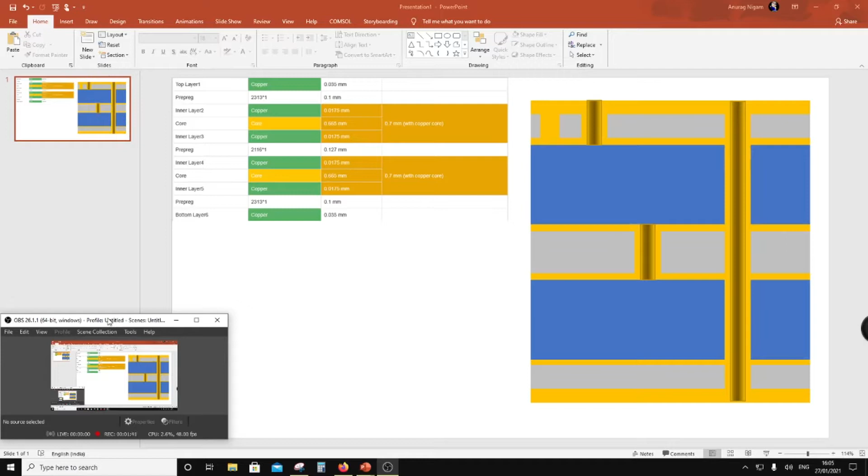Now the issue is, you can do what you call vias, which can be filled vias. Here is an example of a filled via. This via is totally filled. First what they do is they drill through, and then they fill it with some kind of conductive material. So that will be called a filled via.

Now over here you see the other one is a plated through via. What it means is that they drill through, but then they only plate the walls. Now it is easy to do this between two layers.

Now the way the multi-layer PCB is done is they do these two-layer PCBs, and then they can do these vias. But then they stick them together back to back using something called core. So if you see here, there is something called core.

Now the issue is, can you run vias through the core? Well, the answer is no. Can you do metal structures which can stick together? Yeah, but how do you connect them? So you are allowed to do a plated through, all the way from the bottom metal to the top metal.

But then doing the buried vias, you have a restriction that you can do in the individual two-layer boards and then stick them together. Then what do you do when you stick them together? Can you do vias in the core? Answer is no. So this is a big restriction in PCB design.

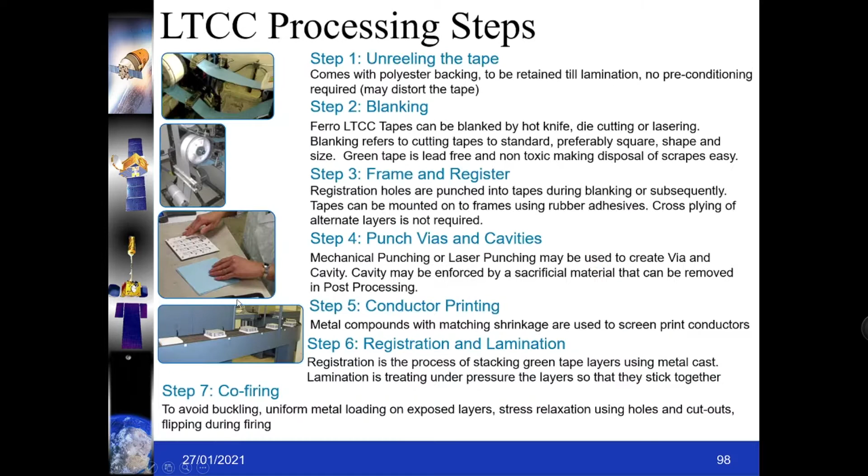Now the top and the bottom can be post fired and processed. Why do you need that? You can create pads which are copper, pins which are copper, and you can also do what are called frames or heat sinks right on top of the top layer. You can also do thick film resistors on the top layer. So that is what happens with post processing.

Now you already know what is a blind via and what is a buried via. You can also do a stacked buried via here. You can do buried integrated capacitor. You can do staggered via, where vias can be staggered, and they are very stable. Then you can do thick film resistors which are buried. And you can also do cavities.

In case of cavities, after you plate it through, you can insert a support for the cavity using some form of a sacrificial material, which after post processing you are going to remove, so that you have a clean cavity without buckling and all that.

Now calcium borosilicate is not a good thermal conductor, so all the heat has to come out through these vias only, and heat has to go to the ground. In this case, the thermal conductivity of these vias is good, but it is not going to be uniform, in the sense that you are not going to have stacked vias from top to bottom. So in that case you can have thermal vias which will take the heat from different layers and conduct it to the ground. That is what a stack up looks like in case of an LTCC.

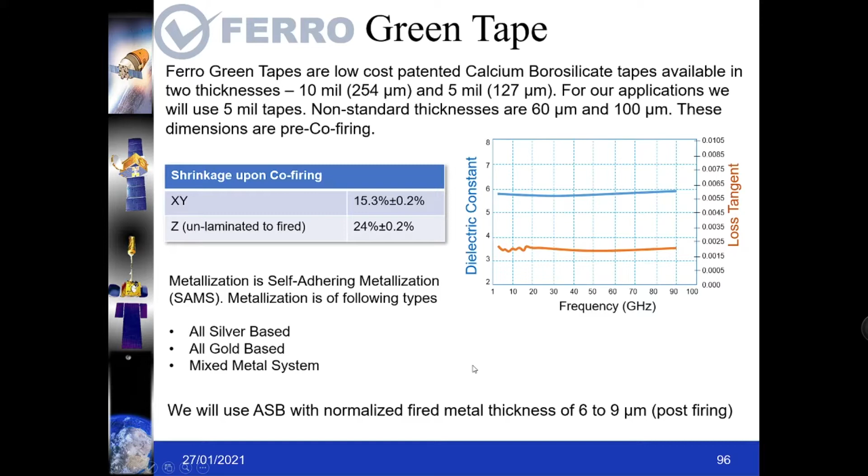Next, this can be a silver based system or a gold based system or a mixed metal system. Now pre-firing, usually this metal thickness is large, but post-firing it can come anywhere from 6 to 9 microns. So in your EM simulation the metal thickness will be 9 micrometer.

Now here what I'm showing is post co-firing processing, where you have added these shields, which are metal frames. There can also be what is called heat sinks, which you can attach. You can mount surface mount components. You can even bond the chip or a die. And then you can put a lid on it, take the air out, and hermetically seal it. So this can be done.

Now the material is chosen or designed such a way that the metal contraction or thermal expansion is the same as the tape, in terms of temperature coefficient of expansion. This is so that when you do it, the shrinkage is uniform. Shrinkage is one thing, and coefficient of expansion is another. Across temperature cycles, this TCE is going to be very less on this material, and shrinkage is uniform for metal as well as green tape.

Next is the thermal conductivity of the vias and thermal vias. Thermal vias have 50 watt per meter kelvin. There are some electrical properties of interest to a designer: dielectric constant is 5.9, loss tangent is 0.002, and insertion loss at 10 gigahertz for a trace which is an inch is 1.8 dB. Now the width is not specified here, so that's unknown. Bulk resistivity is 10 raised to 12 ohm per centimeter, so basically it's an insulator.

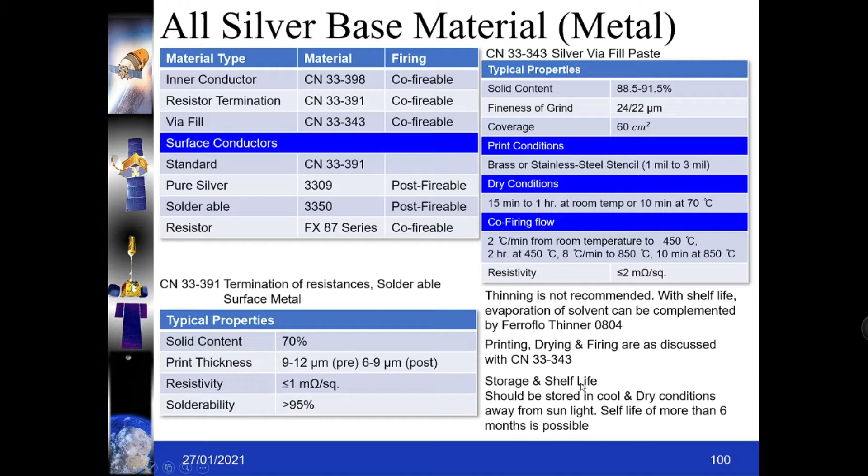So that is the all silver based metal system. Now I am going to use this stack up. Let me tell you what this stack up in ADS will look like. It will look like M0 to M7, which I am going to create. Each of them is going to be 9 micron thick, and it is going to be silver, so it is going to be 6.17 e raised to 7 Siemens per meter as conductivity, which is over on the left hand side.

Then for the top, if I do pads and all that, I'm going to use copper, which is going to be 5.8 E7, and the thickness is again 9 to 10 micron. Then for the thick film, I'm going to use FX87101, so in my stack up I'm going to declare this as 100 ohm per square. And then for soldering, the top pads, I can also plate them with the solder material, which is going to be 0.71 E7 conductivity. So this is what is going to be there.

I also have a layer which is going to be a dielectric via or a cavity. Now momentum will not allow you to do this simulation with the cavity. So the stack can have a cavity, but momentum will not allow a cavity for simulation, so you have to use EMPro or something like that. Now the material is borosilicate, which has epsilon r of 5.92 and loss tangent of 0.002. This I am going to create in ADS before I proceed to do any of the designs.

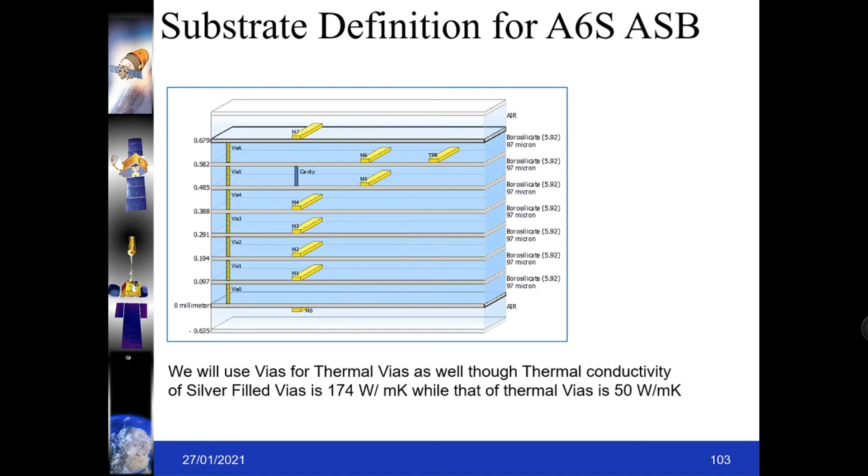Okay, now I have created a 7 metal stack using LTCC 97 micron thickness green tape, and I have one more additional metal which is for a thick film resistor, 100 ohm per square. Now you save the stack and close it.

So what we're going to do now is make a new folder and call this lines. Here I'm going to create a 50 ohm line, so I'll create a schematic, microstrip line, MICROSTRP, and create a schematic. In this schematic I'm going to create a 50 ohm microstrip line on the LTCC process. The signal is on metal 7 while the ground is on metal 6.

So I'm going to go to Tool, LineCalc, open LineCalc, and enter the substrate details. The substrate epsilon r is 5.92, height is 97 micron. Thickness is 9 micrometer. Conductivity of silver is 6.17E7. Loss tangent, tan delta, is 0.002. That's it for the substrate.

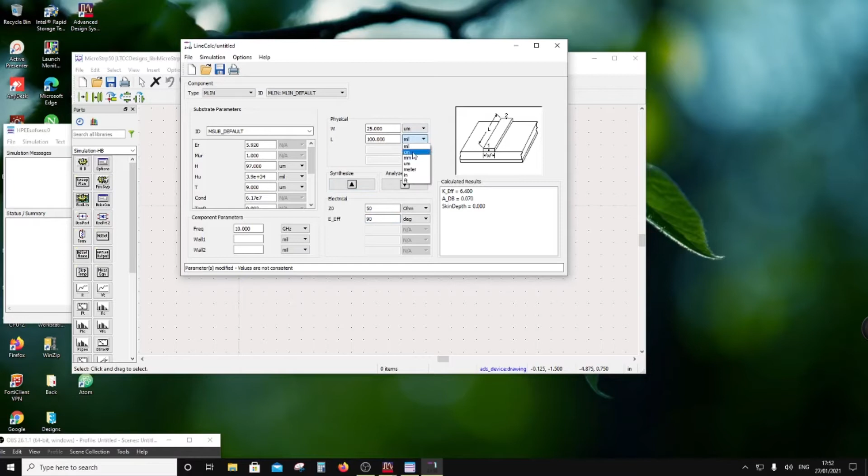Then we make sure this is going to be a 10 gigahertz line, and I'm going to make it a 50 ohm line. So I put 50 ohm, and the length of the line is 90 degrees, or quarter wave. I want the units to be micron. Then I hit synthesize, and 139 micrometer is roughly the width, and the length is roughly 3900 something.

I'm going to go and make a layout for this. So this is the information. Now let's go ahead and make a layout.

Previously we did this 50 ohm line and found the FEM results from ADS were differing from the MOM, momentum, results in ADS. This time we're going to validate it against FEM in EMPro. So let's create a new layout for the same schematic.

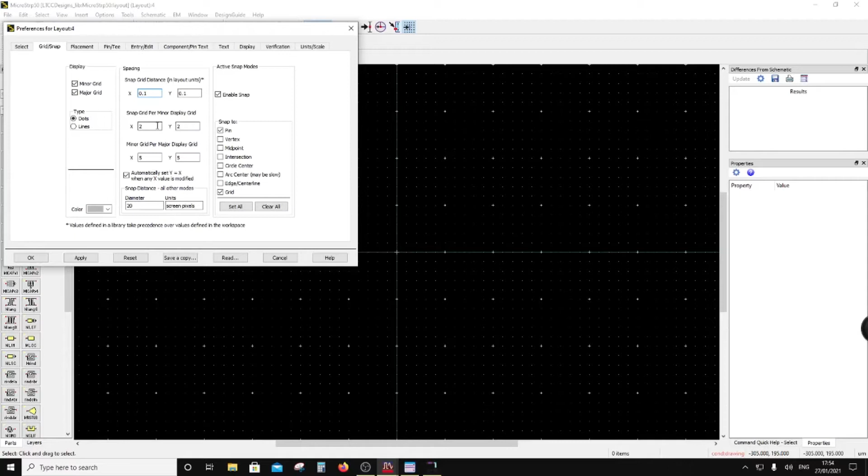Let's adjust the grid size. I want to keep the grid to be 0.1 micron, minor grid as 1, and major grid I leave as 5. I'm going to save this as a layout preference for the next simulations and layouts.

So now I'm going to use metal 7 to draw a line, 139 in width. First I'm going to set all the snap grid options, and enter the coordinate entry absolute value as 0, 0, where I'm going to start drawing the geometry from. I have to change the metal from conductor to metal 7, and I'll redo this. There you go, metal 7, and then I'm going to draw a rectangle and insert coordinate entry.

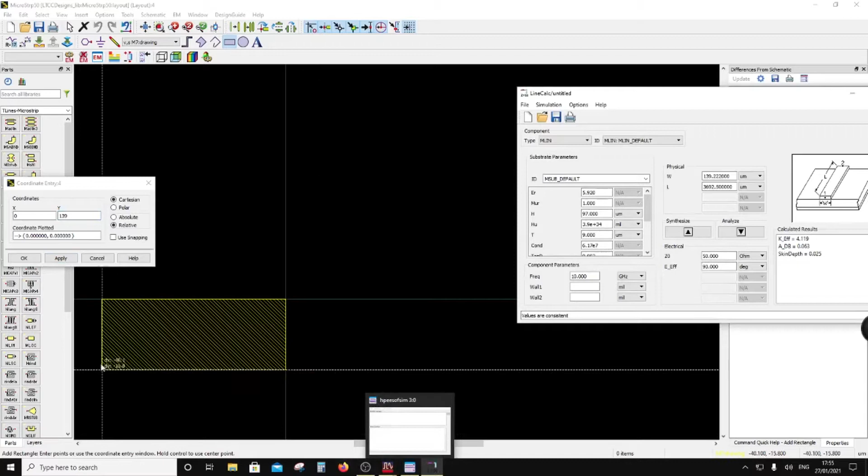Insert coordinate entry, 0, 0 as absolute entry, then say apply, and then the dimensions. The y dimension is 139, and the x dimension is 3,000 something. Okay, so this is the line, the quarter wave line as per the LineCalc.

So I'm going to go ahead and put the ground. I'm going to put quarter wave on both sides of the microstrip line. The way to do it is just take this structure and rotate it out, then extend it to the edge. So delete this one, extend this to the edge, and then repeat this structure at the top.

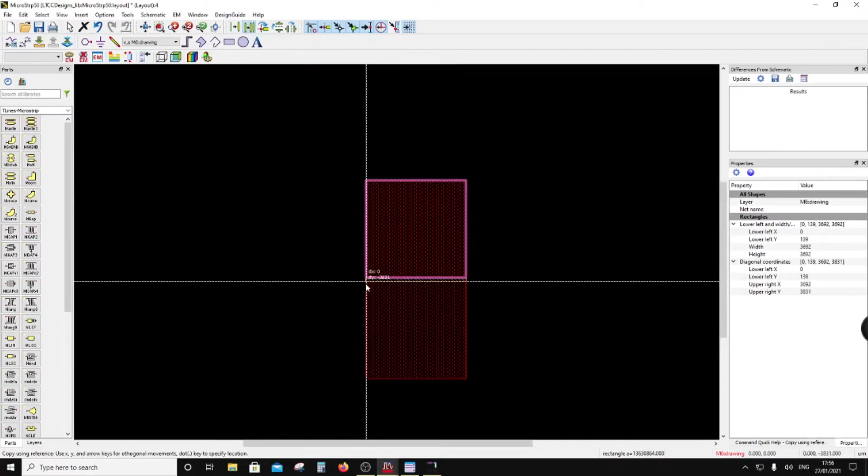I'm going to copy the structure, not move it. Then I'm going to extend the structure to be a single structure and delete this square. So now I have the layout of a microstrip line which is 50 ohm.

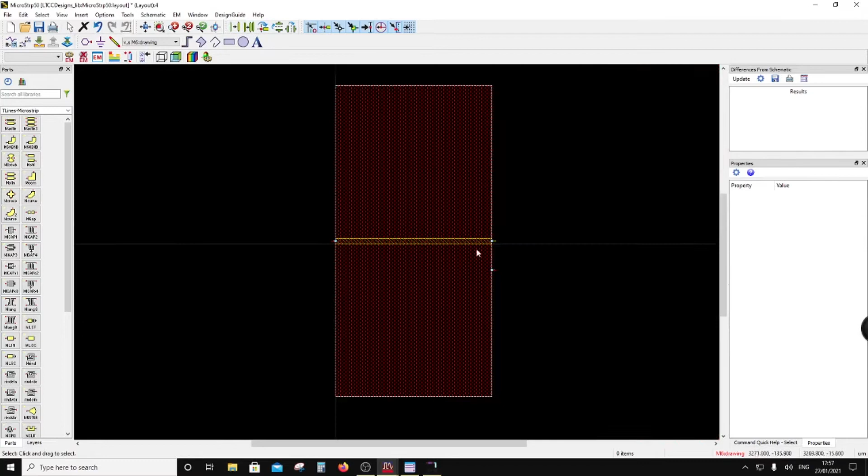I'm going to put port 1, then port 2, and port 3 is a ground reference to 1, and port 4. Snap to edge is enabled, so there's port 4. I'm going to move this ground port under the signal port, remove this additional piece of line, then move port number 4 underneath port number 2 and remove this additional piece of line. Now I have the structure ready.

Now I'm going to go and create the EM simulation setup, and go to substrate to make sure the substrate I've defined is over here.

Then I'm going to go to port editor and add port 3 to port 1 and port 4 to port 2, and I'm ready for the simulation. But before that, I should see a 3D EM preview also.

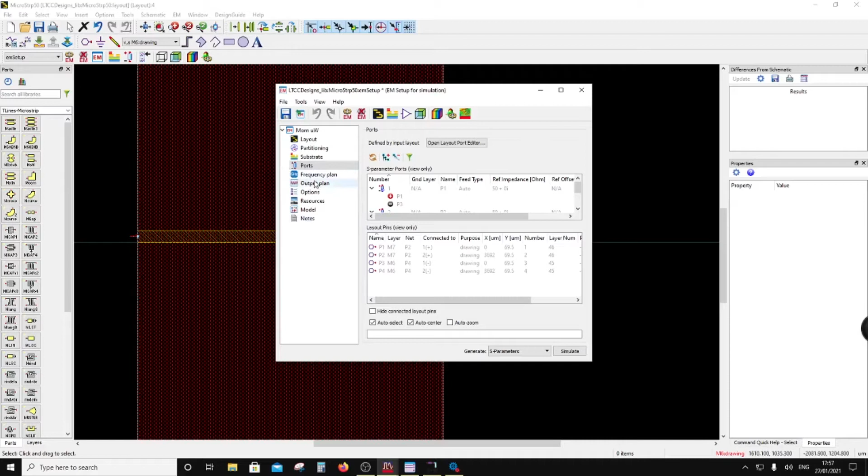So what I'm going to do is first mesh, edge mesh, transmission line mesh, and then I want to save the output for all the frequencies. I'll set the model to be saved, show that the model is saved, and I'm all set. Everything is right.

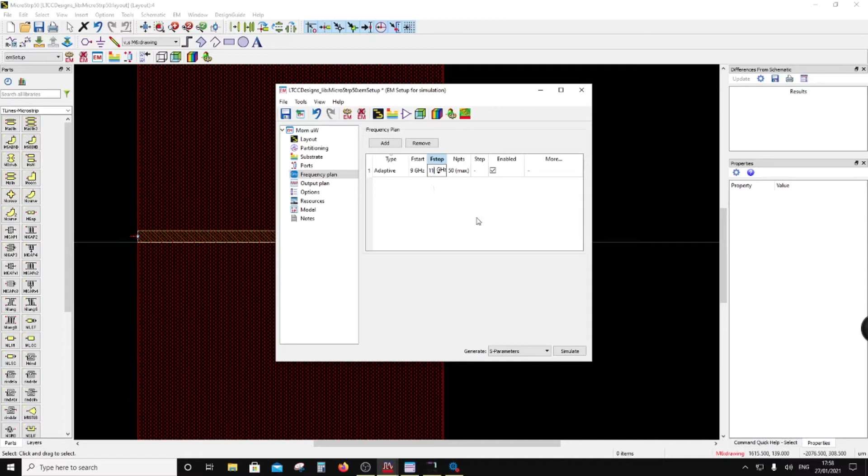Adaptive frequency: I'm going to simulate from 9 gigahertz to 11 gigahertz adaptive, and create one more point, the DC point. So I'm going to create a DC point here, add single, instead of adaptive use single at 0 gigahertz. So I'm all set for hitting the simulate button.

Let me just check that all frequencies are saved. And one more thing - I'm going to change the data set to show that this is a method of moments simulation, so I'll rename this with an extension of MOM, meaning this is a momentum simulation. Then I'm going to hit simulate.

So I'll go back to EM setup, and everything is all set. I can hit simulate.

Meanwhile this is going on, I'll put you on pause. It is computing green functions for the substrate, so it's going to take some time. One more thing you should check is the 3D EM preview to make sure the ports are connected properly - basically they should go from the ground to the signal, and that's correct. This green functions computation will take some time, so I'll pause and come back when it finishes.

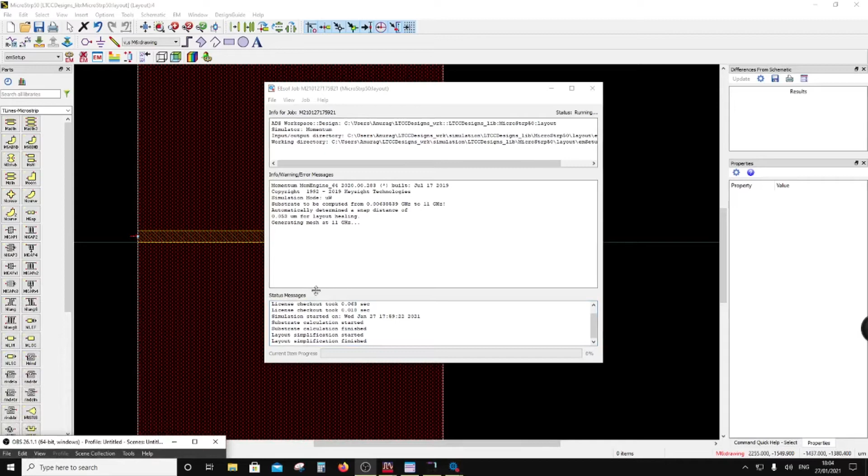Okay, the green functions computation for the substrate is done. Now it's going to mesh it. So this has finished the simulation, and the impedance looks like 50 ohms from DC to 9-11 gigahertz. This looks right, so let's go ahead.

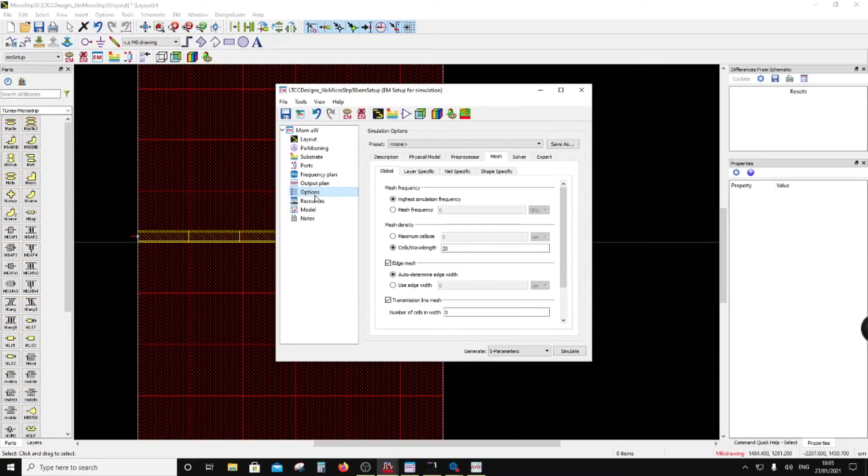So let's go ahead and do FEM simulation. I'll go change this. Everything is okay, so I'm going to change the file - instead of MOM, I'm calling it FEM now. I add FEM to the name of the file, and go to simulation setup to simulate again, making sure I write to the right file. So I'll change the simulation to FEM and hit simulate.

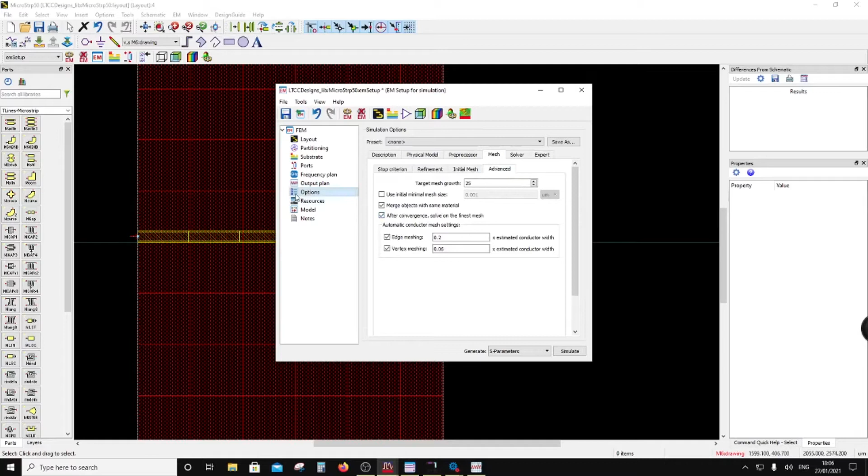One more thing: I'm going to go to the mesh options - options, mesh. All frequencies have to be saved. Options, mesh, then go to advanced, and use the finest mesh after convergence, then hit simulate. It's going to replace the original simulation file - say okay, for the EM model file, say okay, yes, and let it simulate.

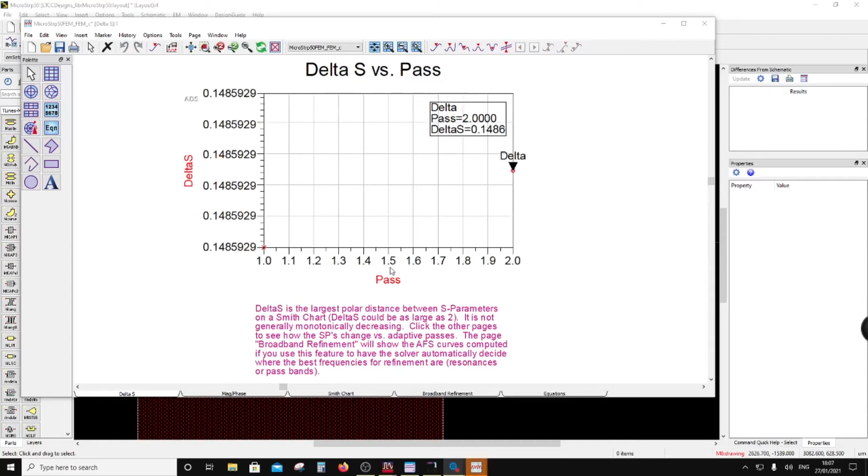So what this is doing is adaptive mesh, increasing the number of cells so as to reduce the error function delta S below 0.02. In the next iteration it has gone up, but it's going to go down to less than 0.02. Okay, now it has - so now it has found the finest mesh for a given error, and it will simulate all the frequencies.

So now what we see here is that FEM in ADS is giving much different results. You see 0 to 11 gigahertz - DC is over here, 9 to 11 gigahertz is over there. So this is much different from what momentum gives you. We have to make a conclusion here - what are we going to rely on? Let me put a marker here that says this is the FEM results, 0 to 11 gigahertz.

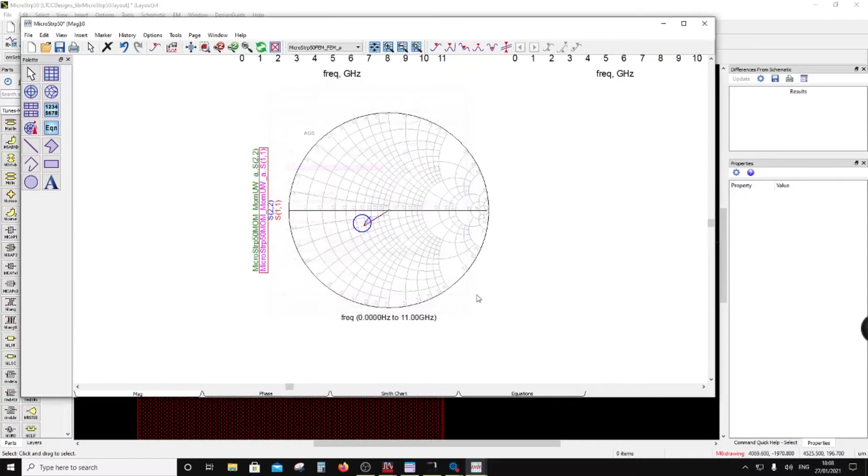Now what I'm going to do is create the same structure in EMPro. So what we're looking at is that the FEM results for the same structure in ADS are much different - this is not acceptable. We have to figure out which one to rely on, whether MOM or FEM in ADS. One way to validate it is to create the same structure in EMPro and do FEM simulations over there, so that's what I'm going to do.

Let me put some text here. Let's see.

Right, so this is a lot of variation. This is unacceptable. I am going to, so I'm not happy with this because momentum is over there and FEM simulation is over here. I'm going to put you on a pause and create a structure in EMPro and simulate.

So here is the result from EMPro on the left hand side, and I see that the result from EMPro is same as that in momentum, but FEM simulation in ADS is much different from FEM simulation results in EMPro. So let me just label it here. Now there is a question to ask Keysight guys: if ADS is using the same engine for FEM, first of all, why is method of moment results so different from FEM? And second, FEM in EMPro is giving same results as MOM in ADS, while the FEM in ADS is not matching the FEM in EMPro.

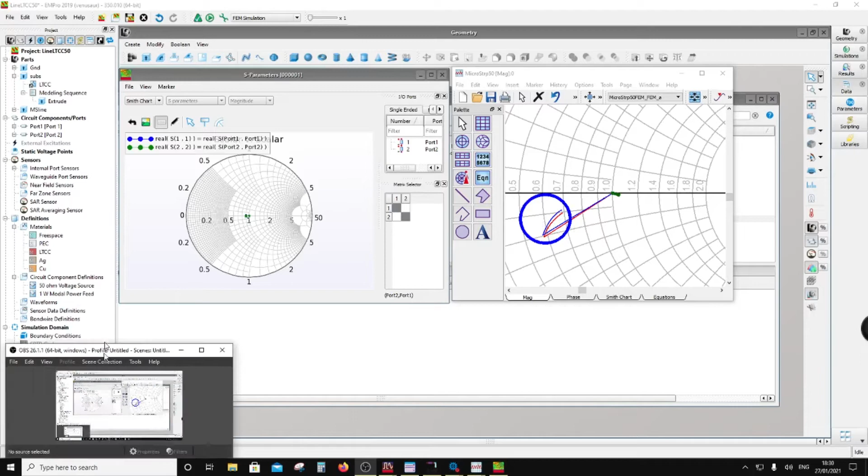So Keysight guys have to make a note of this, and they would have to answer that. What is going on? Maybe it is the extent of the port, right? Maybe it is the extent of the port. So let's see, in ADS, is there a way to set the extent of the port? I don't think so, right? So there is no way to set the extent of the port other than you just set the ground reference. So there is no way to do that.

Okay, let's see. So I don't see that. If somebody can advise me how to change the extent of the port, or if that is itself the reason for why the results are so different, I don't think so. I don't think that that's the reason why the results are so different. Okay, so I'm going to just label this, and I'm going to rely on EMPro for FEM simulations, not FEM in ADS, because it is way off. Let me label this right.

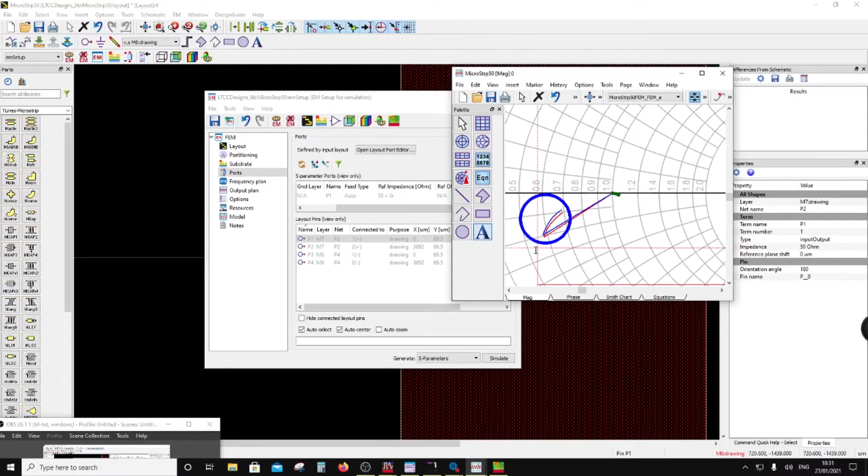So I will put a label here, FEM in... no, not momentum, FEM in ADS, right? So FEM in ADS and MOM in ADS. So the next thing is MOM in ADS. Why is FEM in ADS so different from MOM in ADS? While the FEM in EMPro is same as the MOM in ADS, so these results don't match.

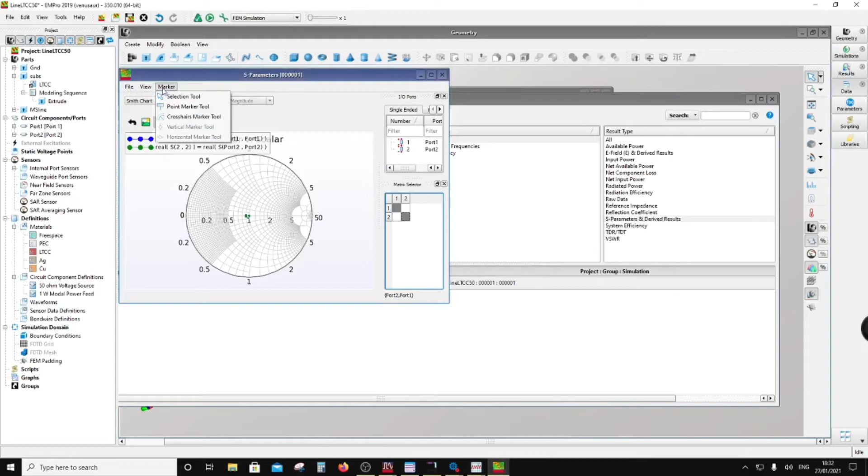This is close to 52 ohm. Okay, so I have made my conclusion. I am going to use MOM in ADS for all my designs. And when I need 3D simulations, I'm going to rely on FEM in EMPro because they seem to be more accurate, right?

Okay, so I'm going to set it up for the next simulations. I'm going to do a Wilkinson divider, right? So I need a 70.7 ohm line instead of a 50 ohm line, right? Okay, so let me just close this and let me just get set up.

I don't see that I've done anything wrong in ADS. There is no way to change the extent of the port in ADS. Okay, so I'm gonna stop here. There's nowhere it is given.

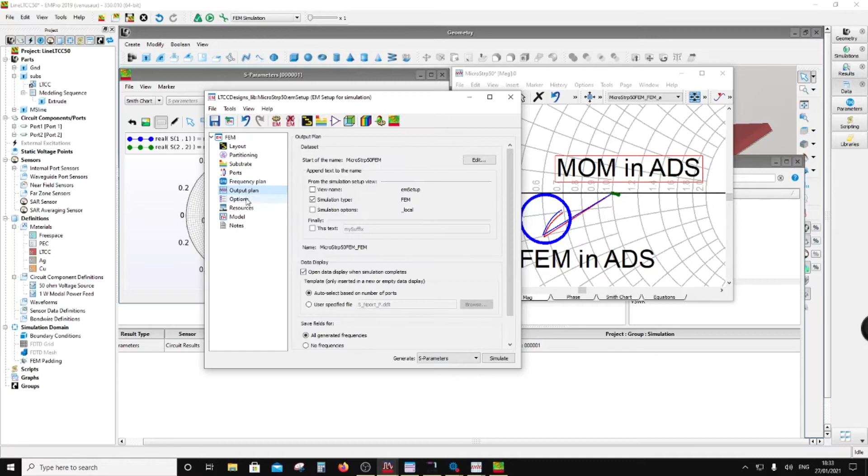So I'm not going to rely on FEM in ADS. It's way off, though it seems to use the same engine as FEM in EMPro. I don't see any other difference. And there is no way to change the extent of the port in ADS.

So MOM looks more accurate in ADS. Same as that in FEM.

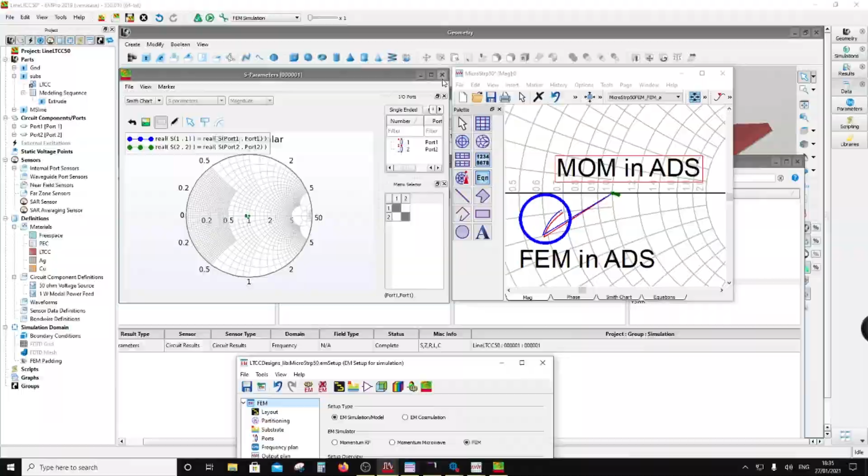Okay, so let me set up a 70 ohm line. So I'm going to make a new schematic and I'm going to call it microstrip, strp 70, microstrip 70 ohm, right? 70.7 or 70 underscore 7, yeah, underscore 7, and say new schematic. Now I'm going to go to LineCalc.

And here in LineCalc, I'm going to change, so I'm going to put back 5.92 as epsilon r, height as 97 micron, thickness as 9 micrometer, conductivity as 6.17 E7, and loss tangent is 0.002. And I'm going to make a 70.7 ohm line and 90-degree long. And I want results in micrometer. And I'm going to hit synthesize.

So this is 65.5 as the width and 3,832 point something as the length for a quarter wave long line at 10 gigahertz. Okay, so I'm going to make a new layout quickly for this one.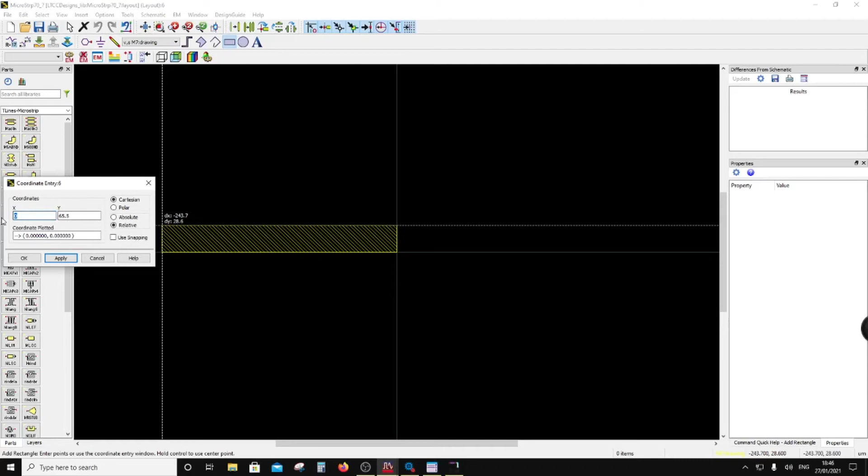I'm going to start with a corner at 0,0, using coordinate entry absolute 0,0. This is conductor, so let me change it to metal 7, and draw a rectangle with origin at 0,0 absolute, then relative, with height 65.5 and width 3832 micron. Say okay. So there's my microstrip line.

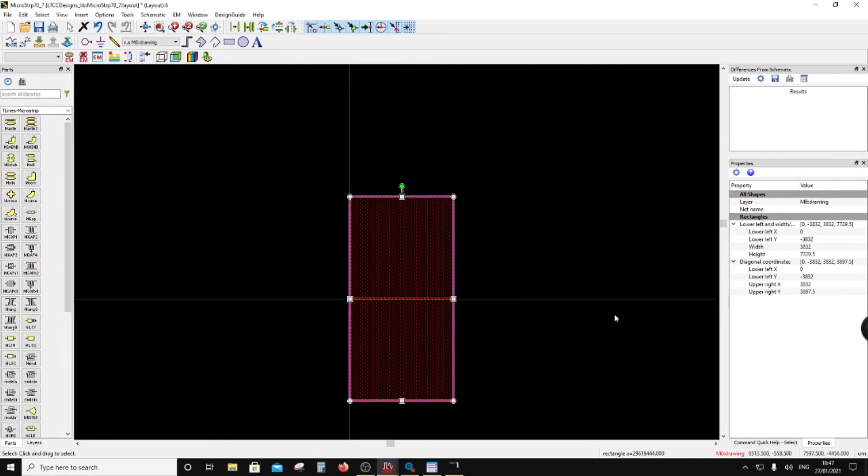Now I'm going to put a quarter wave ground on either side. I'll take the length and make it the width on metal 6, then rotate it and stretch it along the length, so basically I have a quarter wave on either side of the line. This is the best thing I've seen for impedance control, putting quarter wave ground on either side. I'm going to remove the extra polygon on the ground plane, the top one, not the bottom one. Delete. Now I have the structure for a 70 ohm microstrip line.

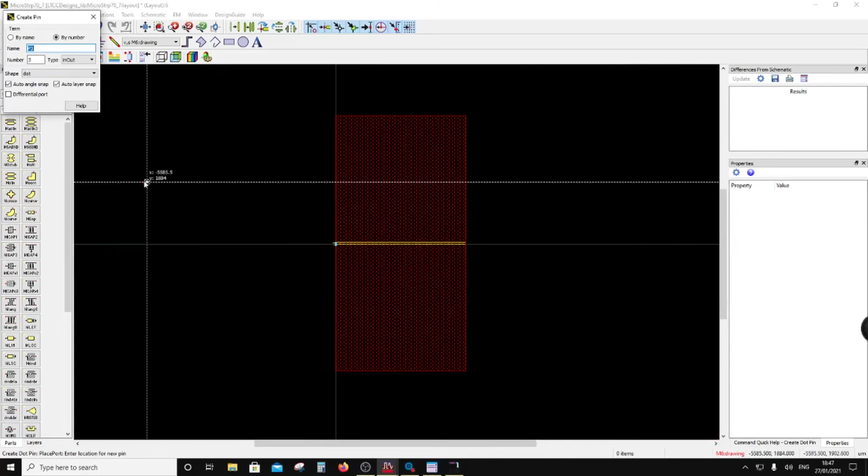I'm going to put the ports. Port 1... no, not here. Port 2 is the signal. First you do all the signal ports, then the ground reference ports, because in simulation this is going to remove the ground reference ports. So this is port 2, port 3 is a ground reference for port 1, and port 4 is a ground reference for port 2. Then I'm going to move them underneath like this, remove this line, move port 3 under port 1 and remove the additional piece of line, and I'm all set.

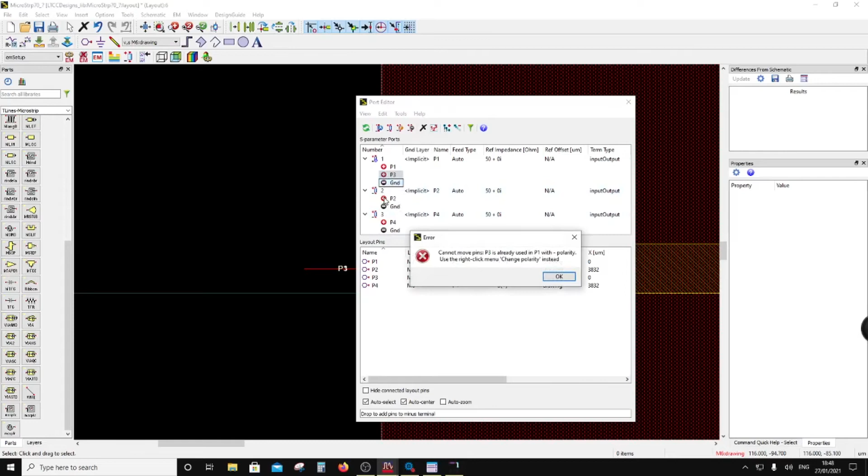Now I'm going to go to EM simulation, create, go to port editor, and port 3 is a ground reference to port 1. Let me extend this. Oh no, let me see if I can correct that, because I cannot move it. So what is the way to correct it? Maybe I can just delete the ground. It doesn't move, right? Oh, now port 3 is gone. No, this is not going to work. The problem is I might have to remove it and place the ports again, because it doesn't let you correct it once you make a mistake. Port 3 is gone, I can't add port 3 now.

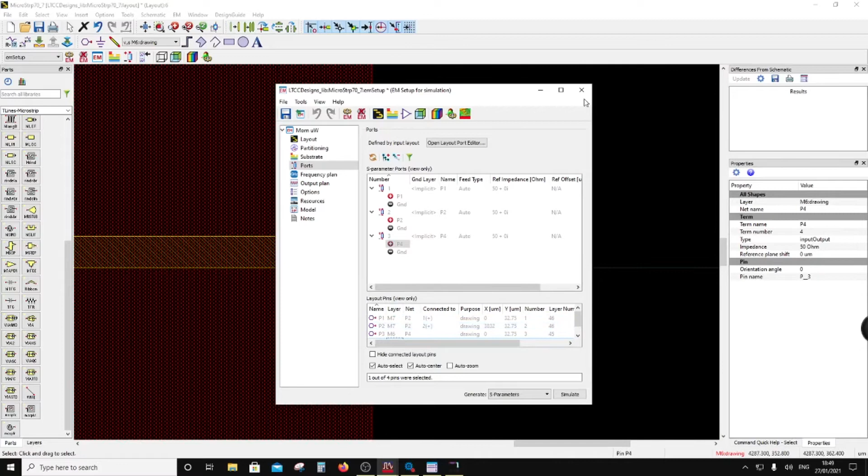So what I'm going to do is delete all the ports now and put them back again. Port number 1, port number 2, port number 3 directly I'll put it, port number 4, and I'll change the metal layer. So this is 1, this is 2, and this one is 4. I'll change the metal to metal 6, and then change port 3 to metal 6 also. Okay, so I'm all set, make sure they're on the right layer.

I'm going to go back to EM setup, and this time I'm going to not make a mistake. Go to port editor and extend this down, so clearly 3 is reference to 1 and 4 is reference to 2. So I'm all set on the ports.

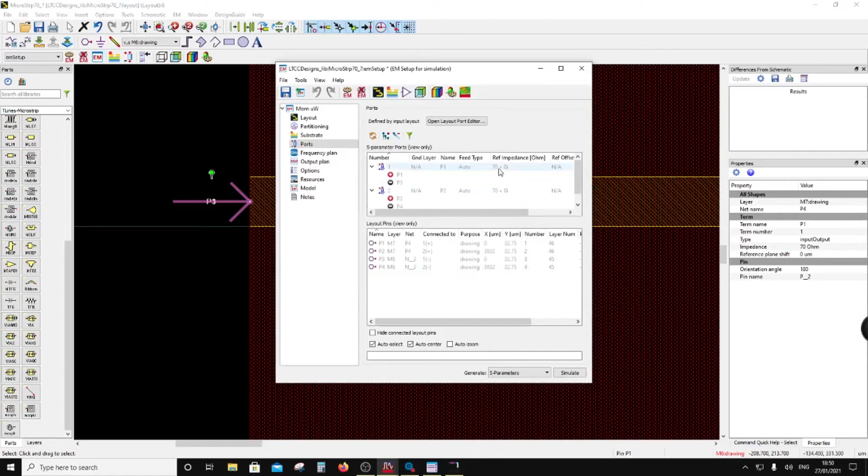One more thing is the port reference was 50. Now I'm going to make it 70. Leave it on auto, because when you do DC simulation, the DC point is going to just get stuck if you don't leave it on auto. Maybe the port has to be 70.7, not 70, so let's go back and put that 70.7. And this is also 70.7. So 70.7 is going to be the normalizing impedance, because these are generalized S parameters, so that will be the center of the Smith chart.

Frequency is from 9 to 11, and I leave it to adaptive. I will not add a DC point. Then under options, go to mesh, edge mesh, enable transmission line mesh. Then ensure that the model is created, and I think we are all set. Save currents for all the frequencies, and then you're ready to hit simulate.

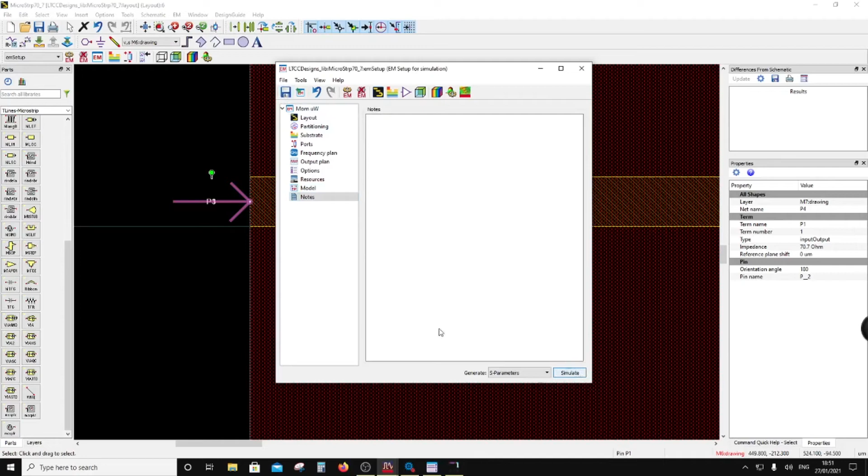Once this simulation is over, we are going to see S11 and S22 at the center, and this time the center is not 50, it is 70.7. So it is reducing the mesh right now, meshing at 11 gigahertz. There is a mesh reduction in momentum. Here you go, it has meshed at 11 gigahertz. Now it is simulating.

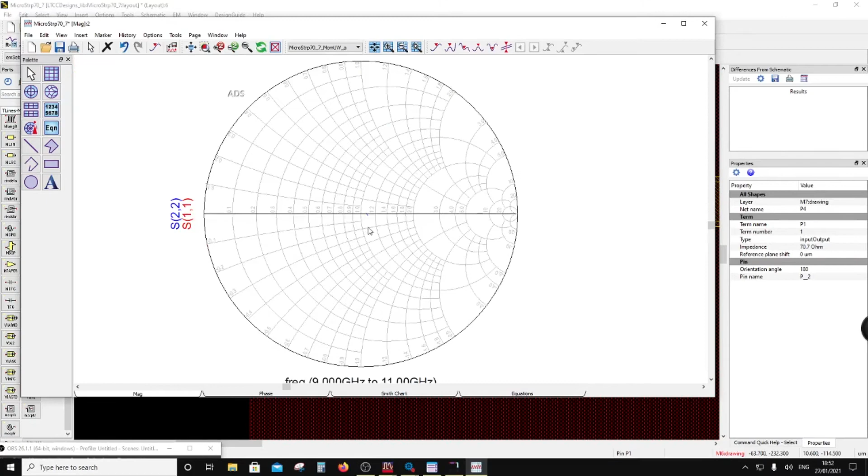Okay, so now I'm going to plot S11 and S22 on the Smith chart. Okay, so they are off center slightly.

Okay, let's now put a marker and see what they are. So this is normalized to 70.7, isn't it? No, 70.7, because the center is the 70.7. So let's put here 70.7.

So now it has read 76. It has to be 70. So we are 6 ohms in error. Now is this an error because I feel that this is a thick metal and MOM does a computation on thick metals? So let me not change this. Okay, I am going to go and create the same structure in EMPro and see what is the impedance.

Yes, I can shrink the width of the line, but I'm not going to do that because I'm not sure whether the momentum gives the right resistance, because it's using thick metals, right? So I'm going to go and change it.

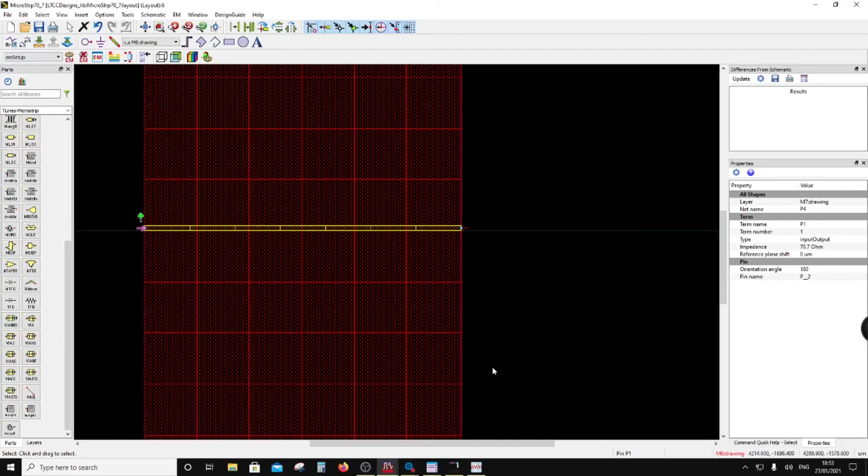So here I have created the EM simulation. 70 ohm is the center. Now this looks much better than MOM. So this shows that 9 to 11 is at 70.7 and the DC is a little way off.

So I am going to not change the dimensions of the 70 ohm line. I'm going to use the same because I don't believe in momentum as much as in FEM and EMPro, right? So I'm going to just use the same width of 65.5 micron for a 70.7 ohm line, right?

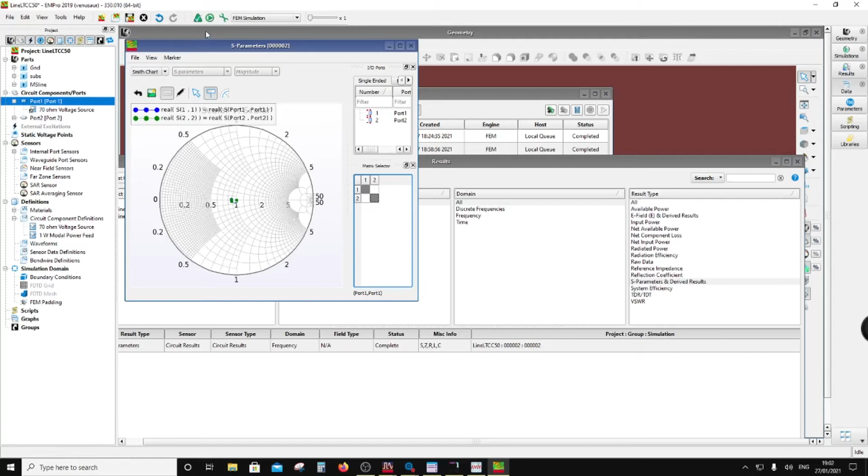Okay, so let me just close this and let's start creating a Wilkinson divider. So first of all, I want to create a Wilkinson divider using this 70.7 ohm line, which is 65.5 micron width and 3832 micron in length, right?

Okay, so let's go ahead, let me get started. Let me put you on pause. Okay, so here I'm going to create a new schematic.

Call it Wilkinson divider two-way, right? So go to files, create a new folder and call it passives LTCC. Yeah, passives. Okay, dividers. Okay, so let's call this folder divider, create a new schematic. Wilkinson div two-way.

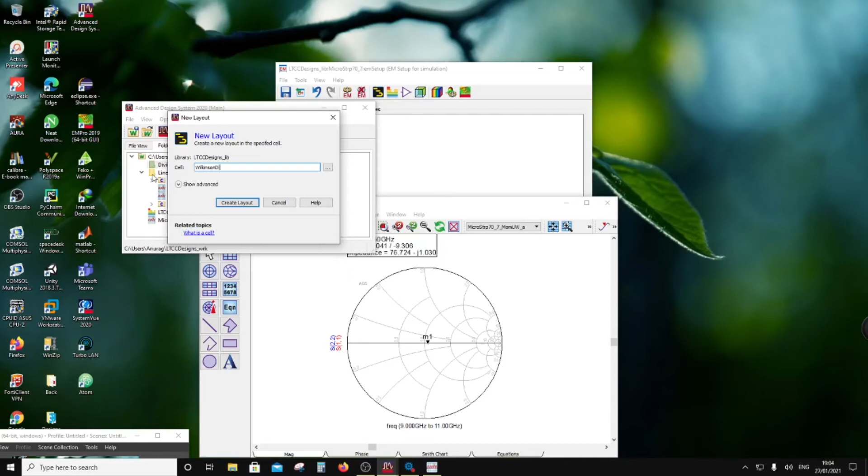Okay, so it's a two-way Wilkinson divider. The divider uses 100 ohm resistance between the two branches. So I'm going to use a thick metal film resistor, 100 micrometer square.

Right, so first of all, let me find out trace, and truncate is the end, and the width is 65.5. So I'm going to start at the origin at 0, 0. Insert coordinate entry, absolute 0, 0. Okay, so now I need to go certain length at an angle, right, on metal 7, right? Okay, on metal 7, I'm going to create a trace at the origin at 0, 0.

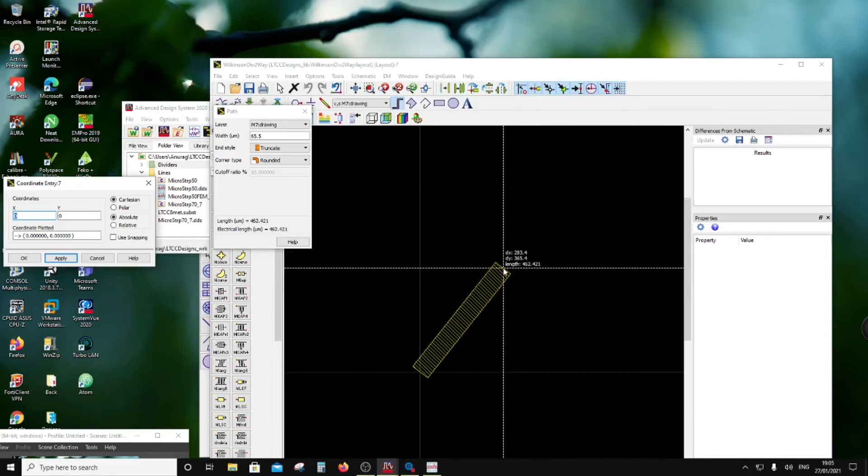Okay, so let me get the length of the line. The length of the line is 3,832, right? 3,832, so that will be the trace length. So I am willing to put 380 or 400 going away from the center, probably at an angle of 300, at an angle of 45 degrees, isn't it?

Don't want to grow like a square, right? Okay, I'll go at an angle of 45 degrees. Okay, there it is, 45-degree angle. Okay, on this I want to go 386,

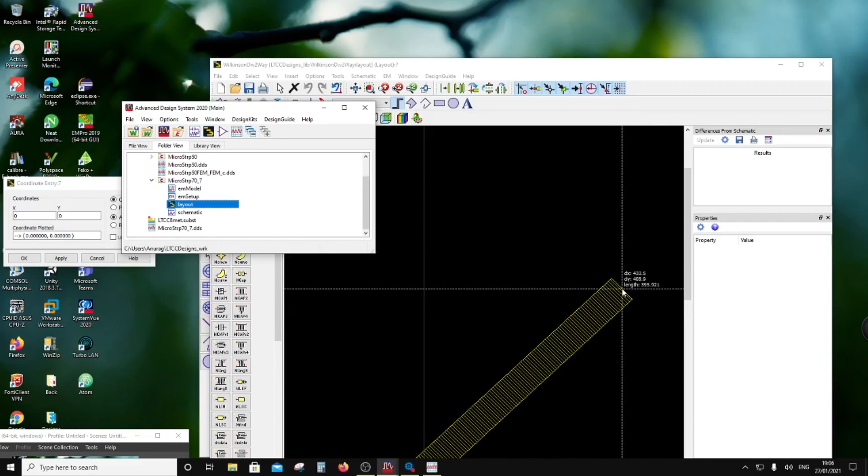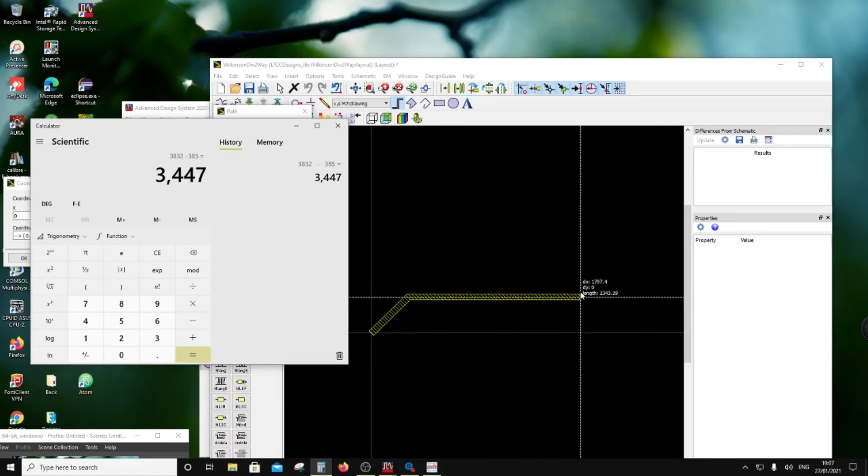and then I want to go the remaining. So 3,832 minus 386. Okay, let's use a calculator. 3,832 minus 385. Okay, 3447. It's over here, long way to go. Yeah, so that's almost it.

And I'm going to double click here. Double click that. Okay, there I am. You want to maintain a straight line. Okay, double click that. Double click. Okay, done. So let me just click tick and check the length.

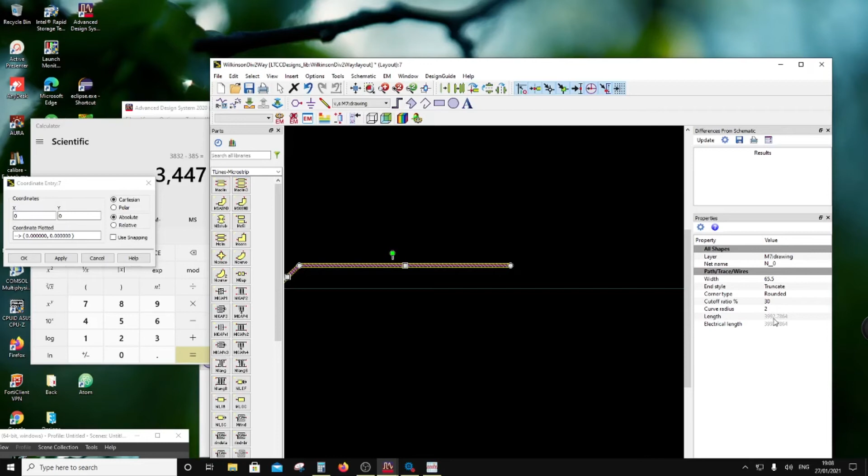It is 3,992. So 3,992 minus 3,832, right? So I'm in error right now. 3,992 minus 3,832 is 160. So I have 160 longer lines. So I'm going to shrink this.

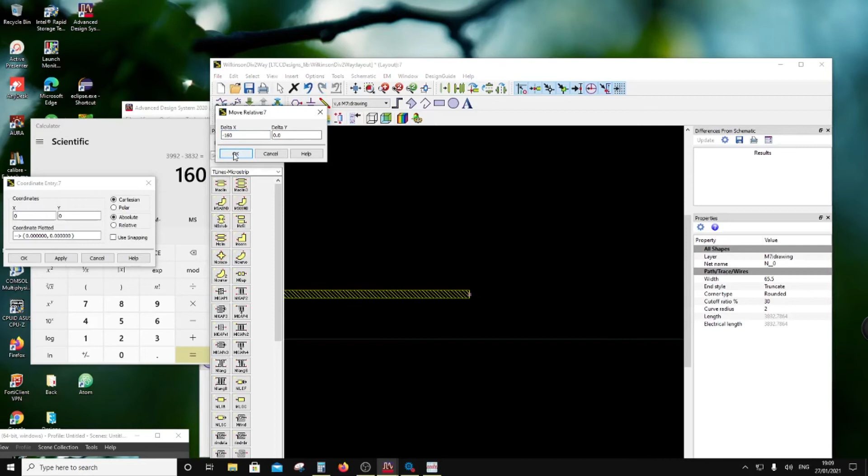Move, edit, move relative 160. Okay. So, oh, sorry, wrong way. Let's do an undo. Minus 160. Say okay. Okay, once I'm done with this, I'm going to take this structure, copy it and flip it.

Copy it and then flip it along x-axis and then match these two corners. So I'm going to move this corner to that corner, and that's my Wilkinson divider. Now I need to add a 100 ohm resistor here, so 100 ohm per square.

So I'm going to use TFR, thin film resistor. I'm going to use 300 and something by or 250 by 250 or 300 by 300. As long as it's a square, it is going to be 100 ohm, right? So that's it. So that I'm going to place at the center.

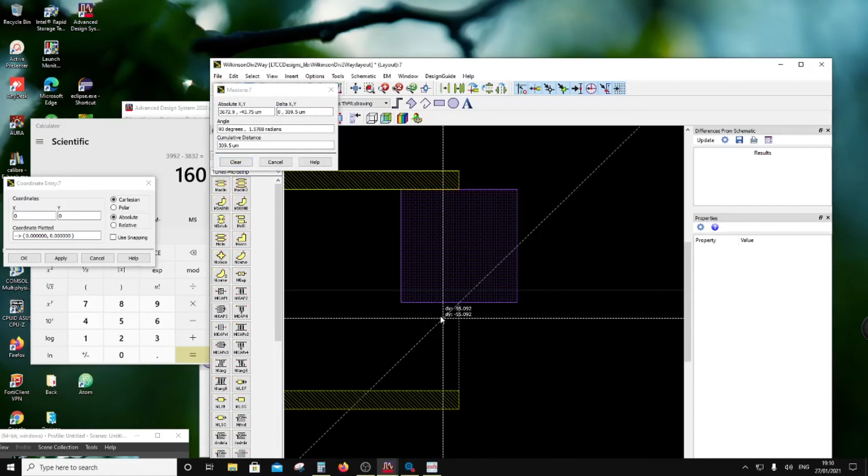So let me just center it out. I'm going to move this down to the center. Let me check how much I have to move from this edge - this thing divided by 2.

So I'm going to move this, move relative, and 150 something - 155, that's almost the center.

Then I'm going to use metal 7 to connect this. So I'm going to put the same width of the line to connect to the resistor. 65.5, right? So let me just put here metal 7, 65.5.

I'm going to rotate this and center this to the resistor, shrink it to the size, and copy this and do it on the other side too.

Sorry, copy this to the other side, isn't it?

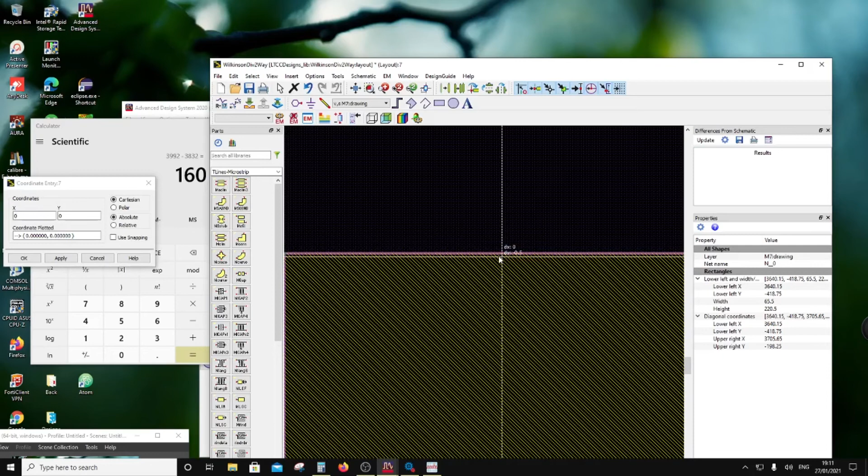Okay, so this is done, but then this contact I need more overlap, right? So I'm going to copy this structure and repeat it again here, rotate this, and put it on either side of the resistor like this, make it the same size, and do the same thing at the bottom.

Okay, I'm done. Now I want to take the two lines to the edge, right? So I need to attach a 50 ohm line going to the edge. My line is 139 micron wide.

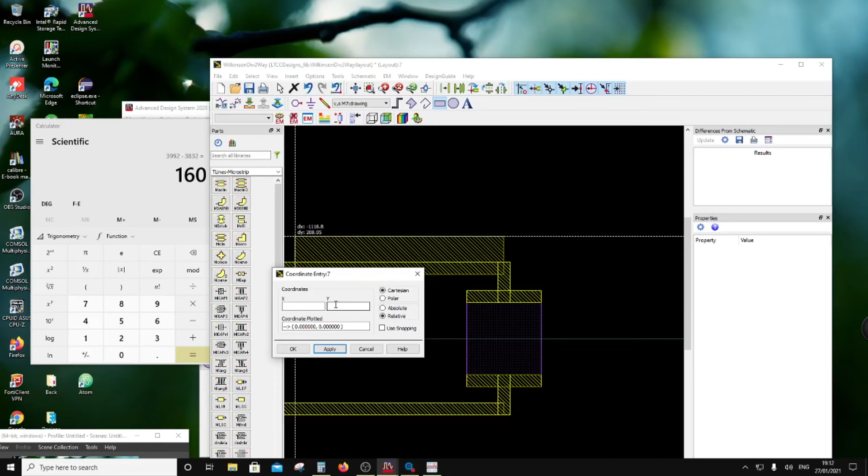So I'm going to put here some line which is going to be some length, let's say 160, 150 long and 139 wide, right? And say okay, and I'm going to center this line.

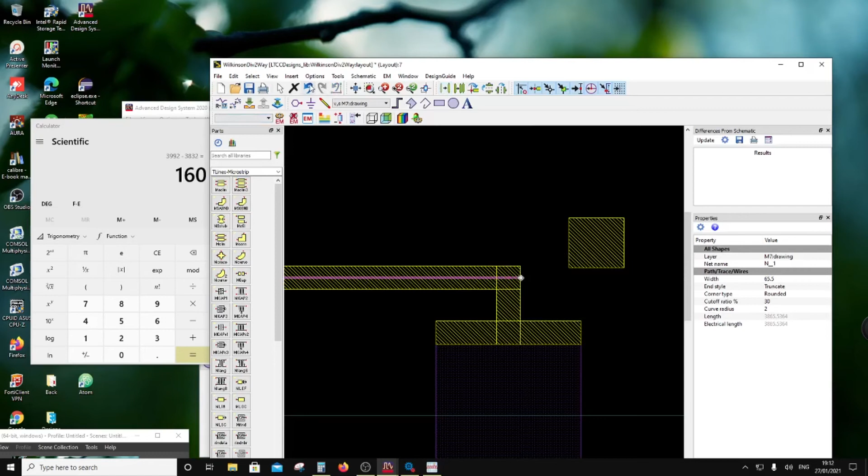So no, that's not going to center this. Okay, let me... okay, let's center this.

I'm going to extend this to the right beyond the resistor and copy the same stuff on the other side.

And I'm going to copy the same 50 ohm line to the input side. Okay, little more to the right.

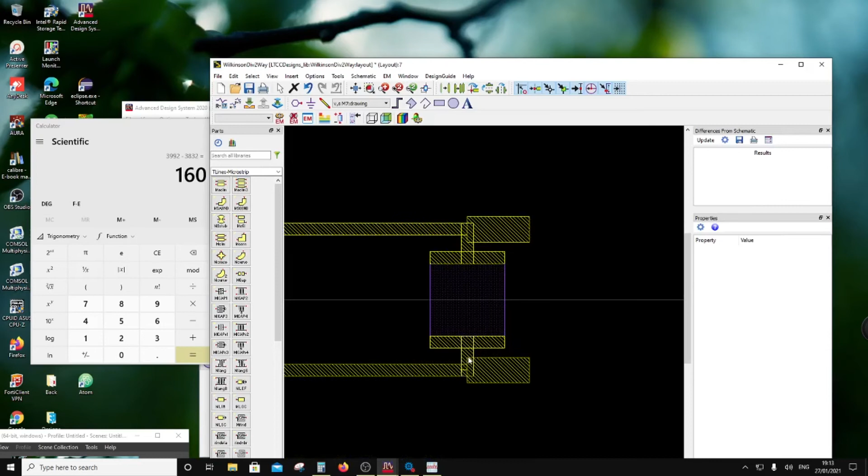Okay, done. Now I'm going to merge all metal 7 layer as one. I'm just going to remove the measurement stuff, which is at the bottom also. Remove that and select all metal 7.

This, and this one, 50 ohm, this connection, everything - and say edit, merge, union, and say okay. So now everything has become a single metal.

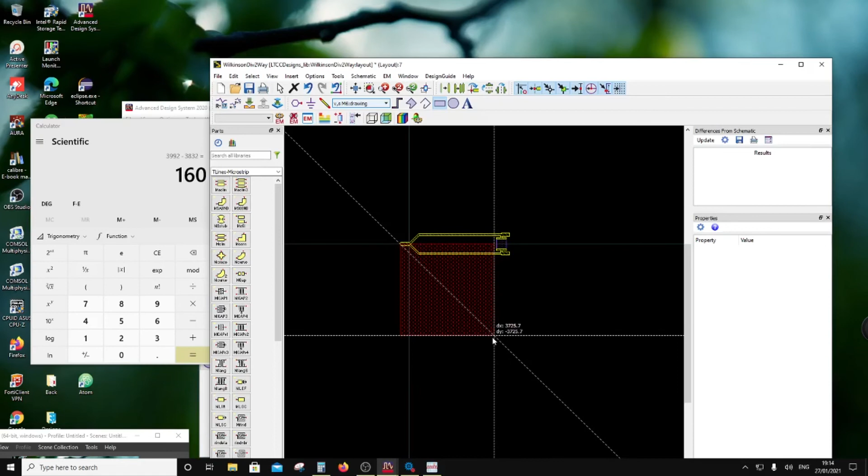Now I'm going to put in the ground plane, quarter wave. So roughly 3832, right? And there you are, 3800 and something.

Extend it to the edge and make a copy of this, repeat it on the top, then extend it all the way down and remove one of the polygons. Okay, so we are set with the structure of a Wilkinson two-way divider with a 100 ohm resistor.

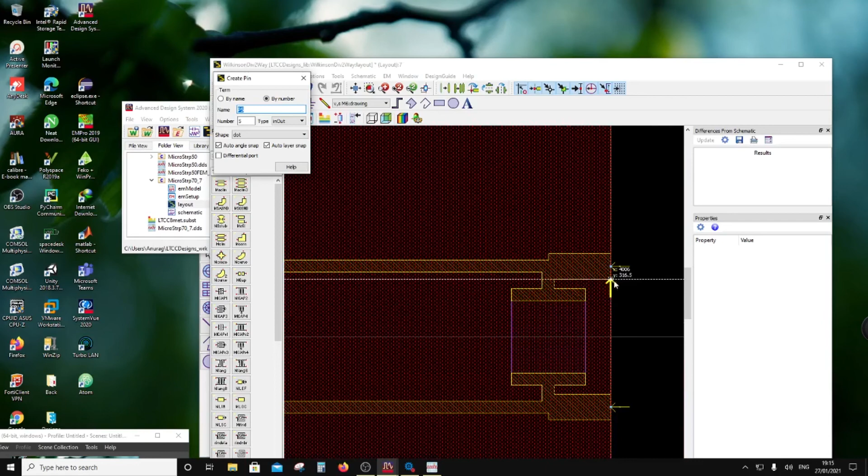Now I'm going to put the ports. Okay, so port 1, port 2, port 3, port 4 is ground reference to 1, port 5 is ground reference to 2, port 6 is ground reference to 3.

Now I'm going to move them underneath quickly and remove this additional line. Same I'll do for port 2 - remove the additional line, delete, and here this one I'm going to move to the initial line. So we are all set with the 3 ports.

Now before I simulate, I should see if everything is okay. So I'll go to port editor. 4 is the reference to 1, 5 is the reference to 2, and 6 is the reference to 3.

So I'm all set. Now I'm going to go and see the 3D preview to see all connectivities are okay. Oh, so the thick film resistor is parallel with metal 6.

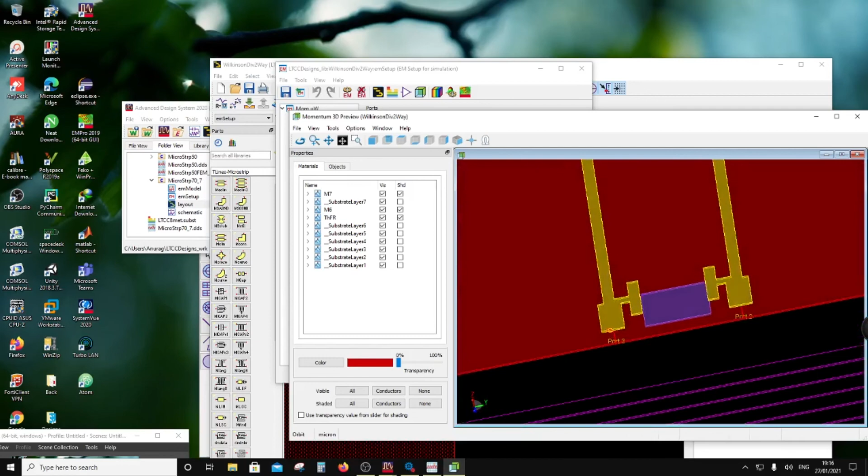Now I don't want to disturb the ground plane. Okay, anyways, we are practicing. So how about I move the thick film resistor to the top, right?

So instead of doing any other edit, I'll go to the substrate. There's no way I can remove the ground underneath, so anyway I'll have to go to substrate and move this thick film metal to be adjacent to the same layer as metal 7.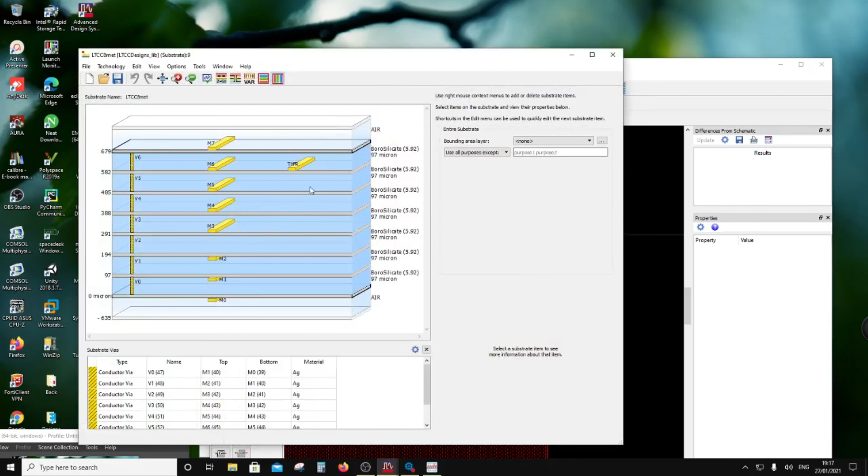This is along with 7, and says save and close. Now I go to EM setup and look at the 3D EM preview.

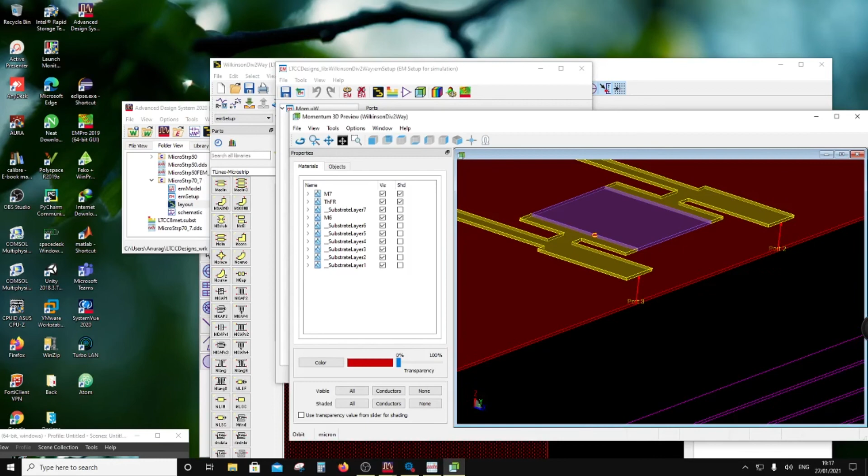Okay, so now this looks correct. So this is connected now. So we have a Wilkinson divider with 100 ohm in between. Okay, so let's set up the remaining settings. So this looks okay, according to me it is connected.

Okay, so now I am going to set frequency from 9 to 11 gigahertz as adaptive. Then I'm going to go to options. Output all frequencies, save the currents for all frequencies. Options, mesh, edge mesh, transmission line mesh, and then create an EM model and hit simulate.

So we are all set. Let me check the ports once more, whether they are having the right reference. So they go from the ground up to the signal, so they look right. So they are referenced right, so that's fine.

So we are ready for the simulations, and hit simulate. Let's see what happens. If everything is right, the answer is going to be 50 ohm on all 3 ports, correct?

Okay, so it is doing the meshing at 11 gigahertz, mesh refinement, reducing the mesh size.

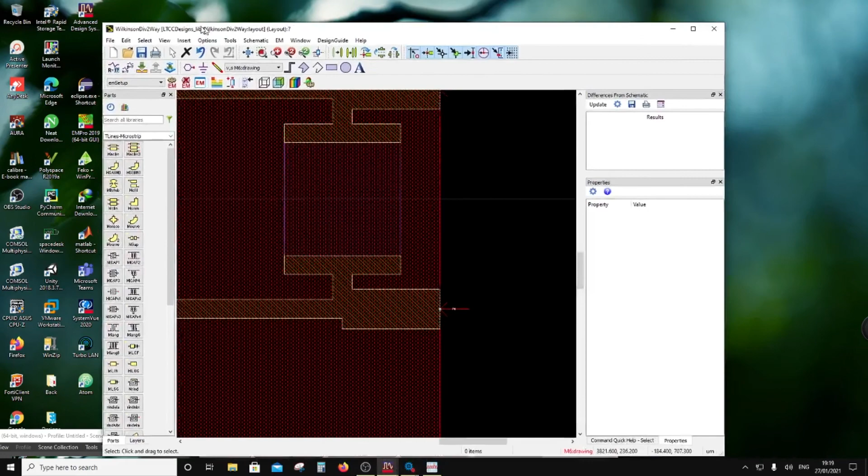Okay, so I guess it's done. Meshing is done at 11 gigahertz. Now it is doing the simulation.

Okay, so I guess it's done. Okay, so now I'm going to look at S11, S22, S33. First of all, to make sure everything looks okay, S11, S22, and S33.

Okay, so well, they are close to 50 ohm, right? So return loss better than 15 is possible.

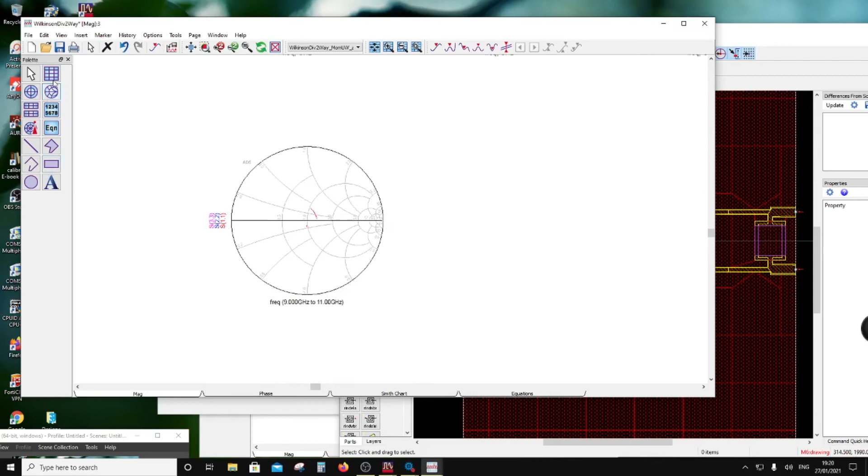And let's look at S21 in dB and S31. So this is 3.3, right? So S31 in dB, okay, that's also right, close by.

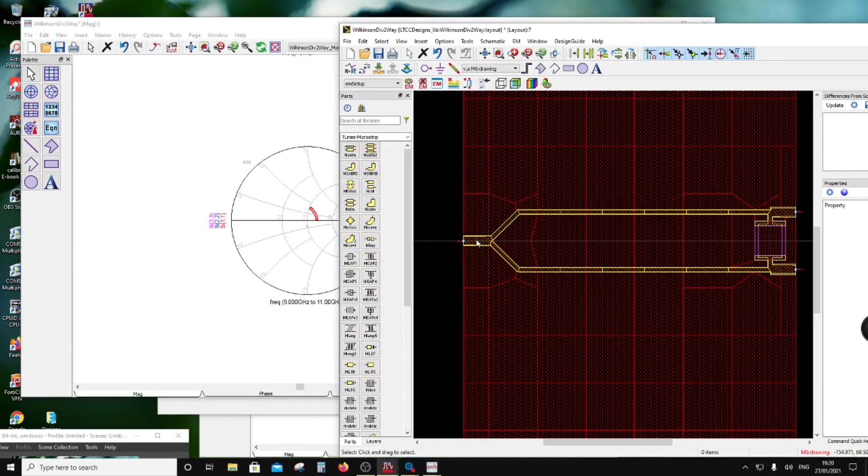So now I want to put S11, S22, S33 on the same graph. Okay, this S11 is off, maybe because of that 50 ohm line. So later we will shorten this one.

Okay, so S22, S33 are close to 50 while S11 is slightly off. This may have to do with the lengths also. You can slightly adjust the length also.

Okay, so I'm going to put everything on the right hand side axis, S11, S22 and S33. So they are better than 15, right? So the worst is S11, but it's still better than 15.

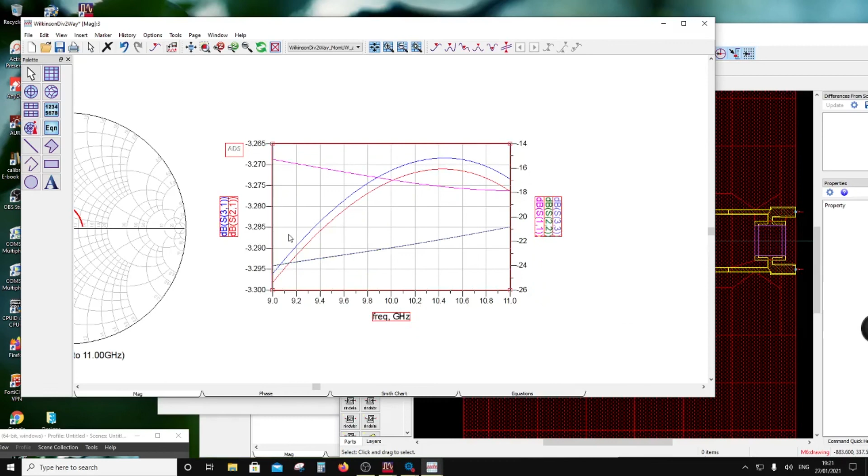So I think I'm done with the two-way Wilkinson divider, right? Okay, maybe. Okay, this I'll change to green so that it is visible. So S22, S33 look good, but S11 is slightly off.

So I'm going to do one more simulation where I'm going to shrink the 50 ohm line, if that is the reason. First of all, I'll go to simulate and clear mesh, clear momentum mesh.

Then I'm going to move these ports to the side like this. Move the ports to the side, delete this, and then I'm going to move 100 micron in.

So edit, move relative, 100. Okay, I can move 50 more in or maybe 100 more in. No, connector won't fit there, so let it be 100 only.

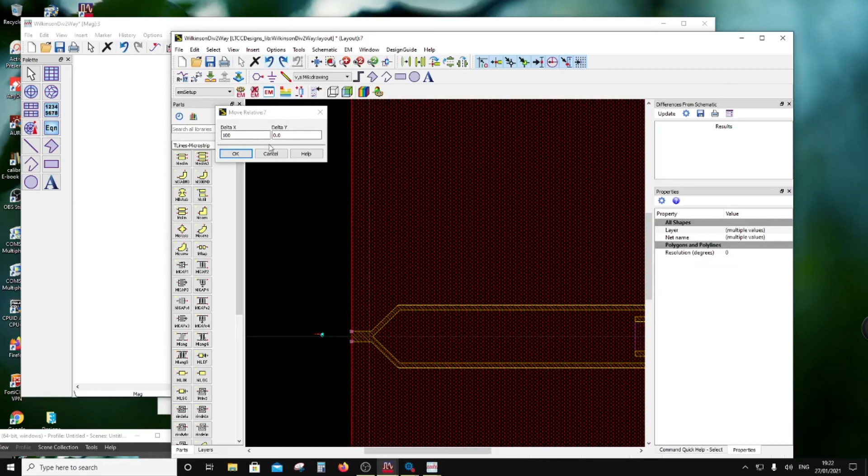And yeah, let's put the ports back. Okay, let's go ahead to EM simulation setup and hit simulate again. Say OK, and it is going to simulate.

So this is the two-way Wilkinson divider. It's going to be slightly improved. Maybe it is the length of the lines itself. You can refine this, but it's going to take time, so I'm not going to do that. This is the last time I'm doing.

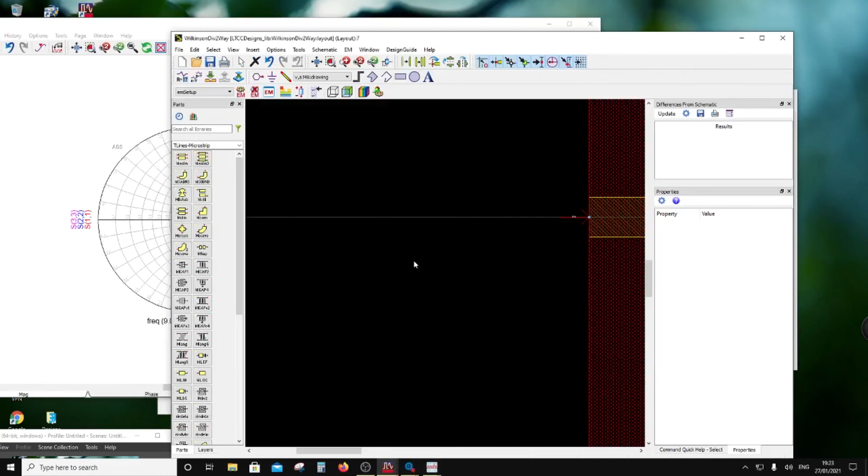So it is going to do the mesh at 11. And it comes out to be almost the same, right? Let's see. So it's doing that, it's meshed it.

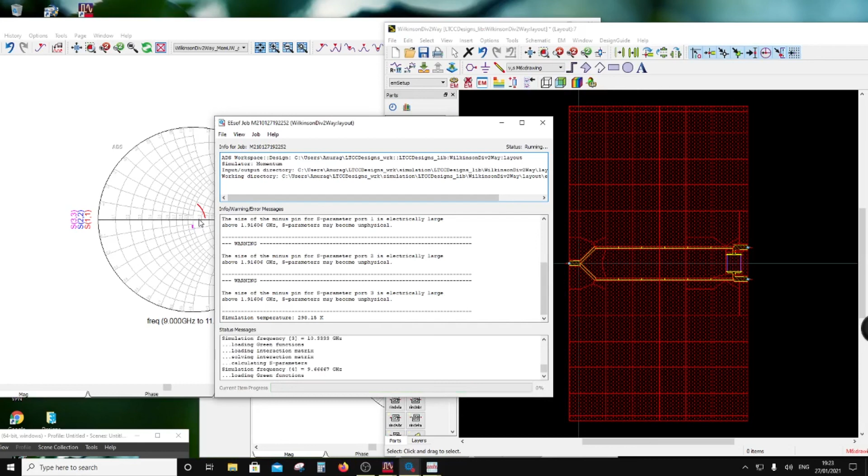Let's keep an eye on S11. Okay, slightly moved, not much. So maybe the lengths of these two branches have to be reduced a little or increased a little so as to improve S11, but it's good enough. It's better than 15 point something.

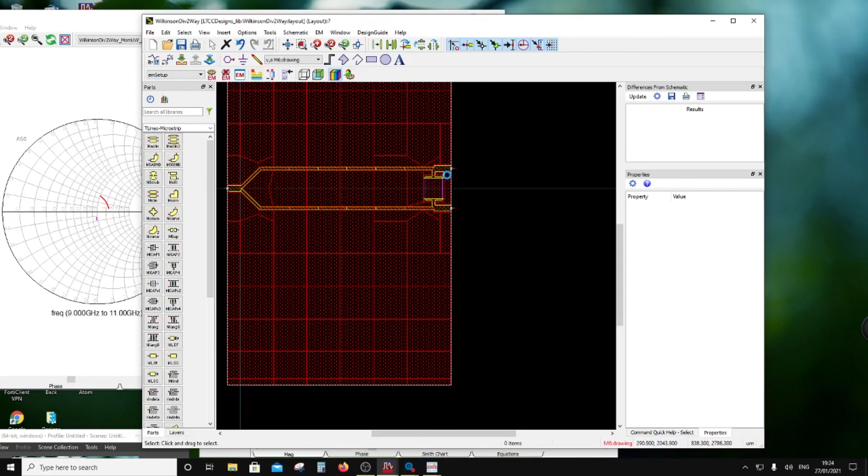So we are done with this. Let's look at the phase also. Okay, first of all, let's go and see how the currents flow. So if I go to post-processing visualization, and I put the power in port 1.

Okay, so at 10 gigahertz roughly, I'm going to put the power in port 1 and hit animate. Port 1, yeah, say hit animate, and change the scale here for the legend to 1.

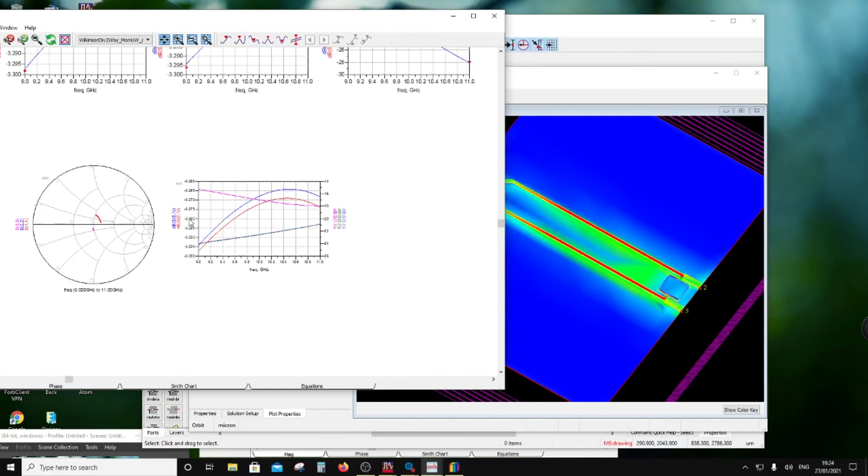Okay, so now I can see that the power is dividing into 2 and flowing in 2 arms. What I want to make sure is that they are in the same phase. So I'm going to go and plot the phase of S21.

So go to phase S21 and then I'm going to do minus phase S31. Should be 0. Minus, so minus phase S31 is 0. Okay, so just click OK.

Okay, and yes, the phase is almost 0, phase difference between the two ports. So the power is coming out in the same phase, it's just divided into half. So there is an insertion loss of around 0.4 dB on each branch, right?